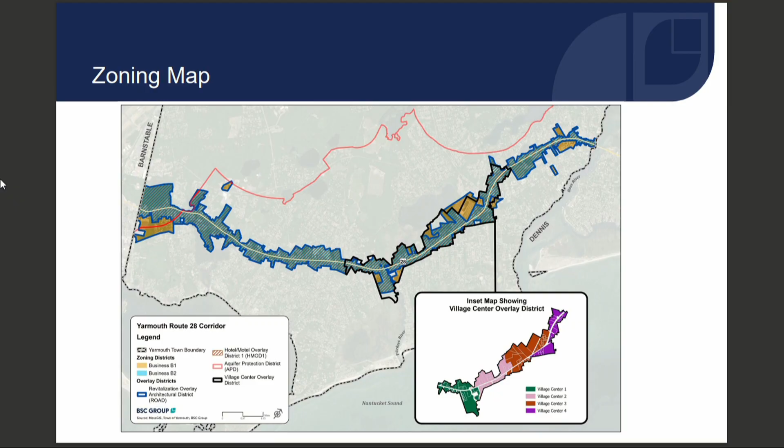Part of our project is an intensive look at permitted projects. I want to add a disclaimer that this is not necessarily a comprehensive list of every project on Route 28. We worked with Kathy to get a really great list, but I want to be clear that this is not every project, certainly not some of the smaller ones that might have changed use in a building. We didn't look at those in detail.

We looked at the larger projects that were either big renovations or new construction. We did look at 21 projects and created a spreadsheet, which is in the package of material. I promise I will not show the spreadsheet or glaze over looking at it, but what we did capture were important components of each project: address, approval date, zoning district, and permit type. Just basic information to catalog the projects we looked at.

An important part about the status is there are projects that were approved, permitted and built, and those are depicted on the map. But then there are projects that were approved and not built. Talking to Kathy, as we finalize our report, we're going to make a finer point to distinguish between projects recently permitted and not built, which probably still have legs and might move forward, versus a project permitted in 2019 or so, where it's unclear if it will move forward. So we're going to do a little more fine tuning on that.

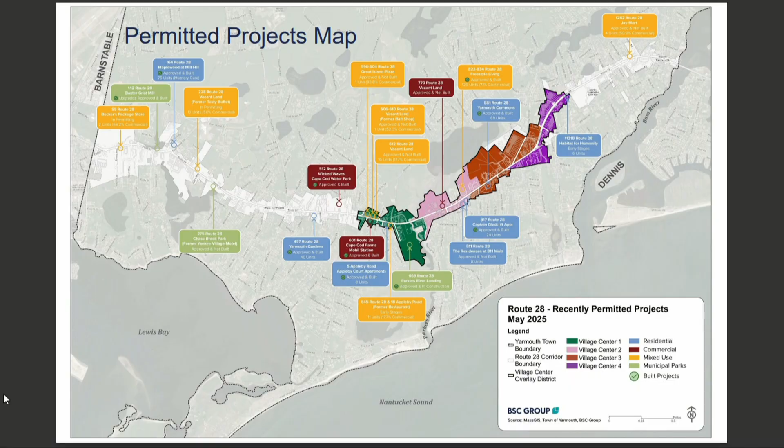Sure. Yep. And I do have, as a preview, just one thing, Joanne.

That's helpful, because I wanted to ask about the time frame that you looked at these, and I see you've answered it with this slide. I don't have an objection to including Captain Gladcliffe, but it was a very long time ago, and most of the others are more recent.

But the one I see that's missing is the hotel, the suites, Hampton Inn. Wasn't that an HMOD? I wasn't here for that, but I think it might have been. When was that done? Big, in 2011? So if Captain Gladcliffe is in there, I think that hotel is really nice, it's kind of the gateway in, and it's national. So I'd like to see if we could throw that on the map.

So we'll first go through the scenarios as Jeremy mentioned. So this is the first site we looked at, which was the 1-acre site. And when we looked at this one, this was looking at the VC3 district. Again, not much you'll see that affects too much between our renderings, but I did want to point that out. So in this case, we're showing the building as a single building, mixed use building where you have commercial on the ground floor and residential units above. And so we've tested this out with 16 dwelling units per acre.

So it's a pretty simple illustrative diagram. We have the building in the front and the parking in the back. I'm trying to illustrate the zoning where we're connecting potential connections to the neighboring sites, and that also the zoning recommendations for the parking buffers and landscape requirements.

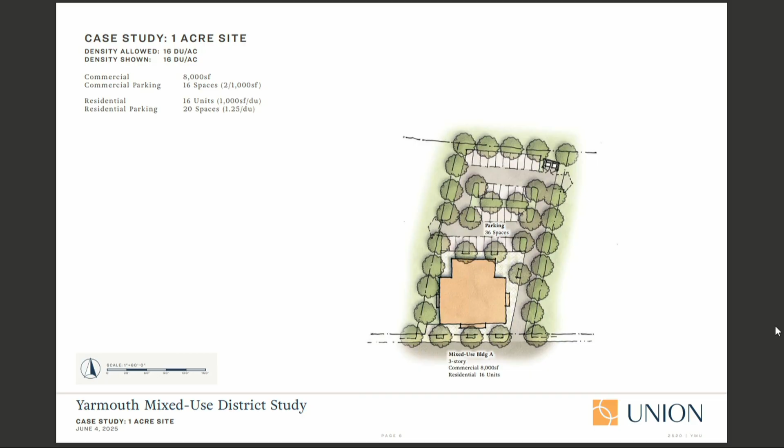And then here is a rendering just showing what that might look like. And you can see on this small site, it does, it's a fairly large building for the parking. So I think it's something to consider as far as what the actual uses might be in the market. But we're showing a 3-story building here with that commercial entry along the street, showing what that might look like with the future updates to Route 28, the shared use path, and the sidewalk on the northern side of the street there, and then a walkway to the back to get to the parking easily.

Can I just ask a quick question? On the 1 acre commercial building, 1 story.

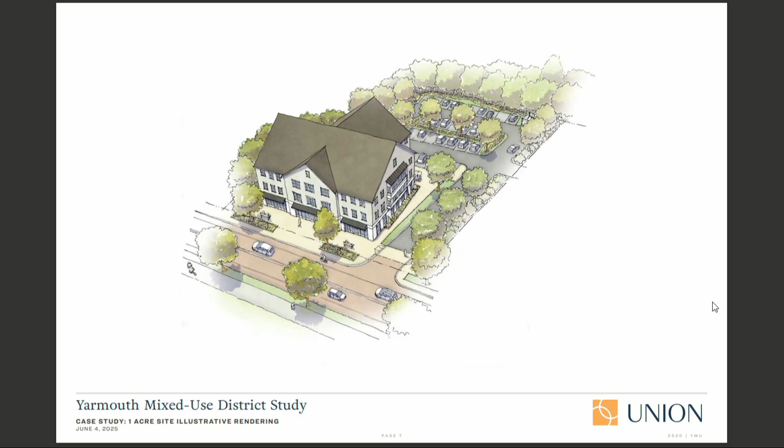Oh, I'm sorry, they haven't talked about it yet. Way ahead of myself, I apologize. Sorry, Erica, it's because we've added some renderings that you don't see in your package. So surprise, there's renderings. I apologize, let me speak to it real quick, and then we'll take your question.

One of the things we were thinking about, just to illustrate the point, was that you could take essentially the exact same 2-dimensional scheme of having a building in front and parking in back. But if you adjust the parking ratios, say a commercial building wanted to park at 4.5 spaces per 1,000 - there's nothing magic about that number, we just had 36 spaces behind it, so that's where the math landed. As illustrated with some uses at the higher end of the allowed maximums, you could have 4 or 5 per 1,000 depending on the use.

You can see how that same site suddenly doesn't have the capacity to also incorporate residential above. We also did the same thing conversely - thinking about a residential basis with the 16 units we had, if they suddenly needed more parking. We had 36 spaces shown, which worked out to 2.25, but even at 2 with 4 fewer parking spaces, you still get the point that what is otherwise almost the exact same 2-dimensional plan, when you go to the 3rd dimension, you just don't have as much stuff in the building because you're losing square footage inside - you only have so much parking to support it.

If you truly are convinced, or legitimately have a use that requires something more than some of those benchmarks we were showing - again, just pointing out that when you start playing with these variables, it can have a real impact on what the ultimate yield might be.

I think this is also a way of thinking about it - the image on the left is essentially what you have out there today. You have a lot of commercial uses with a big parking lot in front, probably calculated at numbers like 4 per 1,000, and that's why it looks the way it looks. So it really is about chipping away at those expectations and finding ways of incentivizing folks to think a little differently, or letting people pivot to uses with less demand, or - to Jeff's point - allowing them to build more residential and a little less commercial, even though this is the ideal spot for a mixed-use zone, just so you can find that reasonable balance everybody is hoping to achieve.

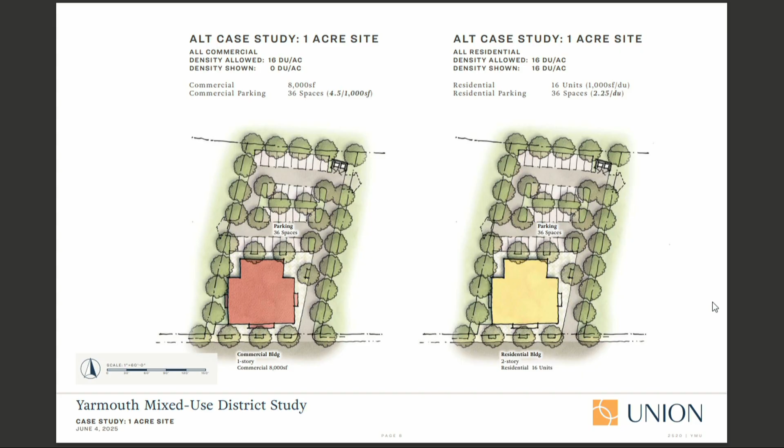May I ask a quick question, Madam Chair? Yes, of course - Erica, a quick question.

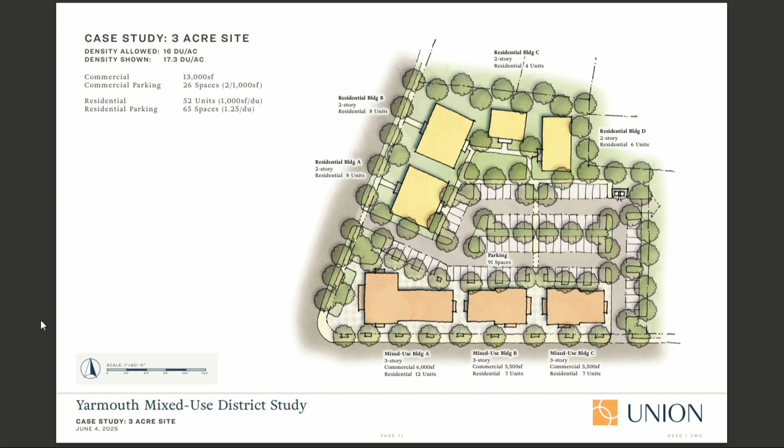But you can see it does create an interesting condition that might want to be considered for the setbacks, since the setbacks are so much greater to Route 28, where we're looking at really like 15 foot setbacks from the minimum. It's just an interesting condition, so it might be something to consider how that's treated on the site, and maybe it doesn't have to be along that whole secondary road. Maybe there's a similar type of residential buffer used in other conditions, but it's definitely something to think about.

What happens with that area on that secondary road on the site?

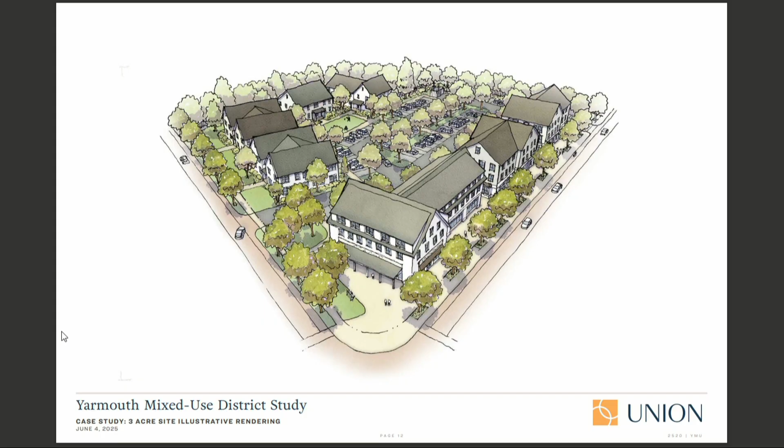I wanted to mention, when I was in front of you guys a month ago, one scenario I thought we might show was residential in the back, but maybe only commercial in the front, so the site overall was still mixed use even though building by building it wasn't. What we found when we drew it up, because we had a bigger lot with a fairly large, efficient parking area in the middle, we were able to achieve a little higher density. That's why we tipped over a little beyond the 16 per acre that's allowable.

But it's still worth thinking about, considering that if a project wanted commercial-only buildings and residential-only buildings, still creating mixed use overall, that's not an unreasonable condition to allow for. It provides more flexibility in what the commercial spaces might be, and more flexibility on how they're financed. If it's phased, with one purely commercial and one purely residential, that tends to open up more options for financing.

So it was something we thought we might show, and ultimately we didn't go that route. But you could picture that scenario, like we did with the one-acre site, where if we thought about parking ratios a bit differently, it wouldn't be unreasonable to imagine some or all of the buildings in front being purely commercial, parked at a slightly higher ratio, with the residential component in back creating a nice transition to the existing residential fabric beyond.

Madam Chair, can I ask a question? Yes, go ahead. So, for Jeremy and Erica, I guess I have a COVID-related question.

The question is, when you think about parking in a mixed-use project, especially but certainly in a residential project, do you assume that people leave and go to another place in their car Monday through Friday, 9 to 5? Is that built into the assumptions, that people go to a physical place to go to work?

This slide was here to bring us back to talk about our code considerations, though it's been touched on a little already. We're trying to highlight that we have these 4 different districts, and as we were looking at it and laying out the plans, we didn't see too much dimensional differences, except maybe the VC2, between them.

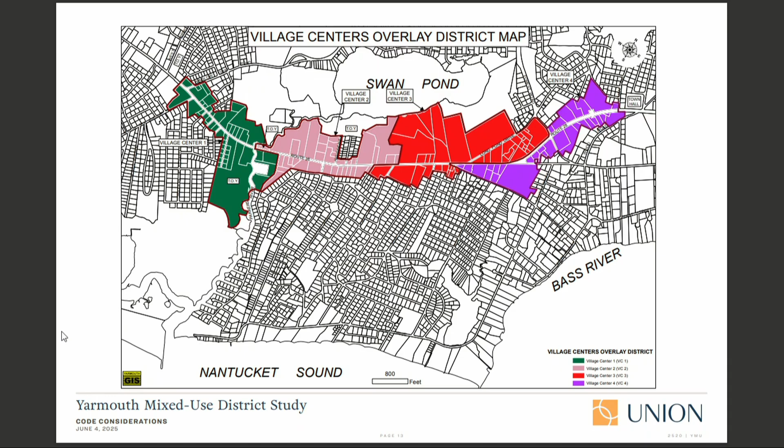I think the concern is always that there's going to be some dastardly developer that comes in and builds some crazy small units, but we just never observe that really happening. In the end, they still need to get it financed. They still need to talk about it with a lender who's got to be convinced that it's a viable, marketable thing. So most zoning codes don't speak to unit sizes.

It's not to say that you shouldn't or couldn't, and we could continue to think about that, but again, we were asked specifically to think about whether these minimums are the right minimums. Maybe they should be a little bit lower to provide more flexibility, or we just question do they even need to be there in the first place. I do think that's one thing we talked about when looking at accessory apartments, like what were some reasonable sizes for a 1-bedroom. We had some examples and the minimum.

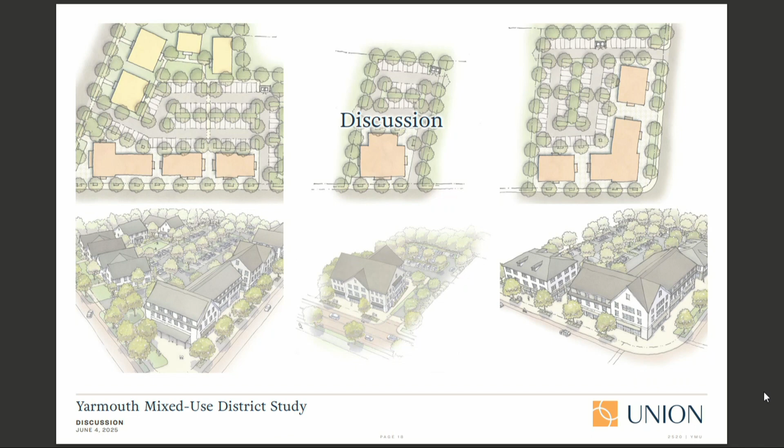And that leads us up to our discussion, and if anyone has any questions on anything we've noted over the past few minutes.

Any questions or comments? Yes.

I was looking at the ladder truck. Sorry, could you just say your name again? Peter. My name's Pete Malpass, I'm just a resident here, but I was looking at one of the ladder trucks out front of the fire station that serves my area, and I don't think it goes more than about 36 feet. So could you have a ladder, is there a fire department limit on the height of your buildings? Because it can't rescue people from higher than a certain height. I was just wondering — my son's a firefighter in Virginia, so I wondered. Thank you.

Go ahead, Jeremy. I was just going to say, it is an important consideration, something you want to understand. I think what's worth noting is that when we say 35 feet is the building height, that's to the upper ridge, at the very top of the building.

So the window sills are much lower than that. So even if you go a little bit higher, a lot of the access they need can be done there. But it is an important question.

Sometimes it's a matter of what is the height to the eave, because that's what the ladder is going to lean against. So you would want to understand and coordinate some of that, but I wouldn't be surprised if the couple of additional feet we're talking about would be feasible, or maybe you bump it up for a 3-story building but not a 4-story building.

Some of the setback requirements, we actually found it was very difficult for us to draw a 4-story building on any of these sites, save the 3-acre site. Our first scheme was putting a 4-story building sort of right in the middle of it so that it would adhere to all the setback requirements, and it wasn't making sort of much sense.